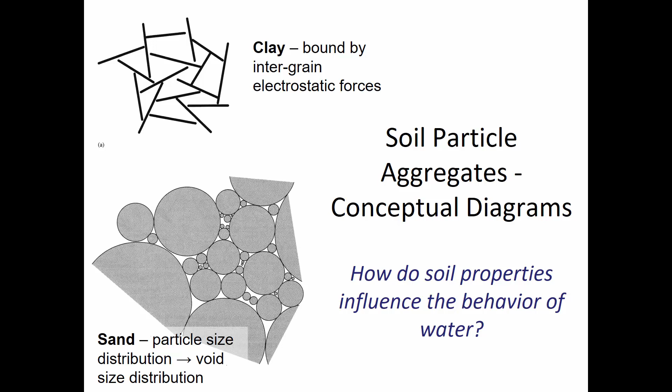So we won't actually do any calculations related to this, but the main point that you should keep in mind is that what we're balancing out with a soil is the attraction that the soil particles have for the water. And if there's a high level of attraction because there's a lot of charge, then the water can't pass through the media as quickly.

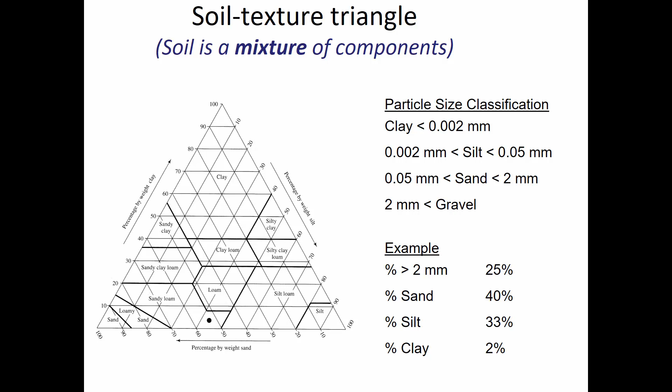And what's kind of remarkable, what was a surprise to me when I first started learning about soil characteristics many years ago, is I would have thought that clay had a lower porosity than sand, because at first the whole charged particle thing didn't really connect for me. When I had a piece of clay in my hand, I thought, well, there just aren't as many pores there. Like there's less void space compared to the solid space, but that's actually not true.

There are sands that have a porosity approaching 45% at the top end of the range. And there are clays that have a porosity at the low end of the range of approximately the same porosity. So this huge variation in behavior that we see for the infiltration capacity of clay versus sand isn't dictated by the porosity necessarily. So the amount of voids is about the same for the two. It's due to the charged nature of the particles rather than the porosity.

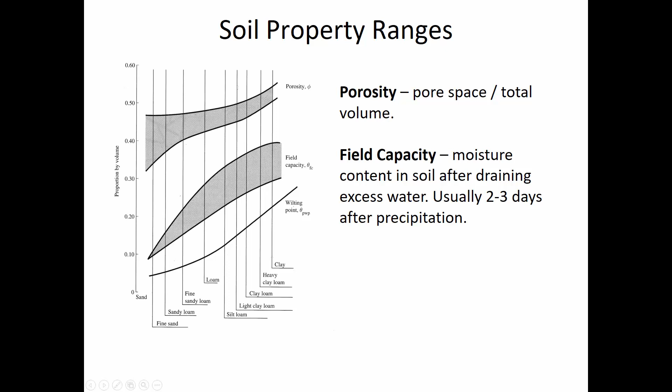And so if you have a watershed with lots of clays where you don't lose much moisture due to draining, then the antecedent moisture condition can have a much more dramatic effect than if your soil type within the watershed is predominantly sands, which drain more quickly.

Wilting point is kind of interesting because it is a description not only of the soil, but also of plants' ability to draw water out of the soil. So there's a tug of war between the plants that are planted into a soil and the soil itself, because they both want the water. The soil because of that electrostatic attraction between the charged nature of the particles and the polar nature of the molecules, and then the plants want the water so that they can survive.

So what this is showing is that you have to have more water in clay for the plants to be able to extract it, because the clay is holding on to it tightly. And so this wilting point is just another way of looking at how tightly clay holds on to water, because you need to have 20% water by volume in order for plants to be able to extract anything. If you have less than that, then the plants are going to wilt, because they can't overcome that suction attraction that the clay has for the water.

But in the case of sand, you can have water percentages down below 5% before you begin to see plants wilting. So the type of soil that you've planted different grasses and shrubs and trees into is going to affect the amount of moisture required for them to survive. So that's an interesting one, wilting point. The basic take-home message for all of these is that water moves through sands more easily than it does through clay. And we can see that directly as well with K values.

Let's talk about the soil water pressure. Now this is actually a suction that occurs in the unsaturated zone. And you remember that in fluid mechanics we talked about a capillary effect, which is due to surface tension. And in the lab we observed that. We dipped a little glass tube down into a cup of water and we saw the water level rise inside that glass tube. There were a couple of examples that we worked through to calculate the delta H that can occur based on the surface tension constant of water.

But the main thing that we saw was that as the diameter of the tube gets smaller, the water will be sucked up higher in the tube. And the reason for that is that, you remember, this is a force balance. The surface tension force is drawing the water up, but the weight of the water above the waterline is what's causing the downward force. And so in the vertical plane, we put those two things into equilibrium, and the weight of the water is decreasing rapidly when you decrease the diameter of that tube, because the weight of the water is related to the volume, which is a function of diameter squared.

So if you make the tube smaller, then diameter squared has a pretty big effect compared to the surface tension force, which is just the wetted perimeter, so the outside circumference of the tube multiplied by the surface tension constant. So as you make the tube smaller, yes, you're decreasing the amount of surface tension force up, but you're decreasing the weight even faster. And so that's why progressively smaller diameter tubes make the water draw up higher and higher. So that effect is important in the subsurface because there is essentially going to be a suction force in the soil grains.

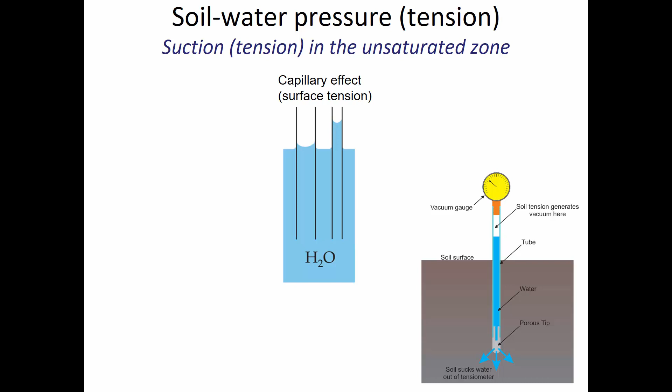So what you'd expect is that dry soil is going to be very eager to absorb the water from an experiment like this. If the soil is dry, it's going to be sucking the water out of the tube with quite a bit of tension force. And so you have higher tension when you have a low degree of saturation. But then as the soil becomes increasingly saturated, there are lower and lower suction forces.

So think about rain. You know, this is just some experiment. You can stab a tube down into the soil, but now think about what if we have raindrops that are coming to this surface. So how does the information that we've gathered from an experiment like this address what happens during a rainstorm? Well, what we can learn is that if you have dry soil, there will be faster infiltration than if you have saturated soil, because there's less suction when you have saturated soil than when the soil is dry.

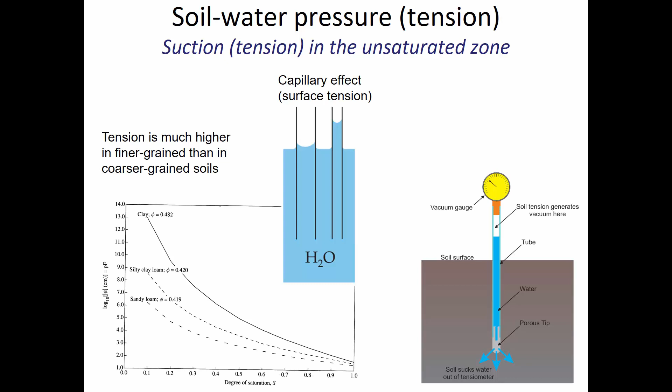All right, so I need to talk more about the idea of interconnected voids. Like when you look at soil as a hydrologist, what you should be thinking of is that's just a lot of little tubes down underneath the surface. It is a bunch of soil grains stacked on top of each other. But these soil grains are effectively the same thing as if we had a lot of these little small diameter capillary tubes, because the water is having to go through some path downward.

And what we could do is we could come up with an average diameter of that path that the water is taking down as it travels through the subsurface. And so if you have sand with relatively small diameter voids compared to a gravel, then the water has to flow through a much tighter path than if it's gravel and these big cobbles with large voids, where the water can pass through it more quickly.

So the unsaturated zone is the area that's above the water table but below the surface. Sometimes it's also called the vadose zone. That just means the zone that air is inside. Sometimes it's called the zone of aeration. When the subsurface is contaminated, different types of pollutants go different places. Some pollutants are very dense, and they'll go to the very bottom of an aquifer until it reaches some sort of a rock or a clay layer. Other types of pollutants, when they're spilled on the land, will only penetrate into this zone of aeration.

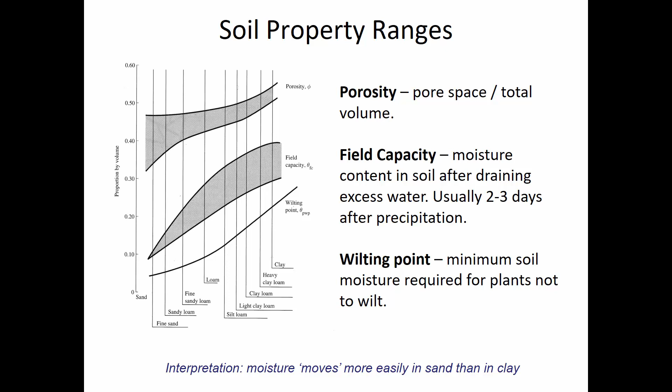And that's where capillary rise comes into play. There's even more water as you get closer to the surface of the water table. Now, below the water table, there's no more air in the voids. It's just fully saturated with water. But immediately above the water table, there's a little extra water there. The moisture content is a little bit higher because the water has been drawn up from the zone of saturation because of the small interconnected voids. The nature of those is that they act a little bit like capillary tubes.

There can also temporarily, on a short-term basis, be more than the average amount of water near the surface. Because when there's a rainfall event, water begins to penetrate down through the matrix of soil, and so the infiltration is the movement of water downward until it eventually reaches the water table. Now, once it reaches the water table, it may start flowing sideways, because you can have differences in elevation of the water table; there could be a lake or a stream over here that the water table is flowing towards.

There could be differential infiltration where you have a lot of clay in one spot, but a lot of gravel at the surface in another, and so there's more infiltration at the gravel spot, and so the water is temporarily perched on one side of the aquifer and flows laterally towards the other. But for now, one of the important things to think about is capillary rise. Now, a little bit more about those voids, the space between soil grains.

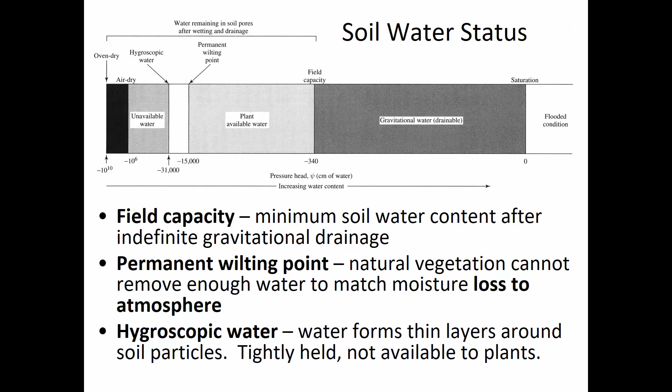So it's kind of like a water bottle, when you dump it all out, there's still like one drop left. That's a great analogy. Yeah, it's going to be even more extreme than that because in a water bottle, the void is pretty large diameter. But in soil the void is pretty small and the particles are pretty small, so the charge is higher on a soil grain. Tightly held.

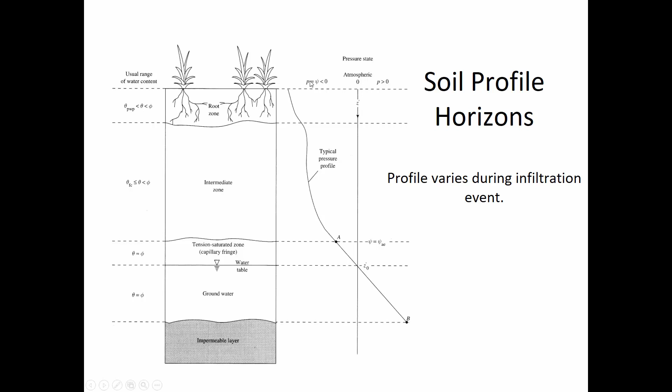Let me just first of all talk about the lateral movement of the infiltration. If we have a free surface of water, like a stream or a pond or something, then with the water that infiltrates from the surface, the water table can be perched, which means it's just a little bit higher on one side than on the other, and so that leads to sideways movement of groundwater flow.

And how quickly it infiltrates depends on what kind of soil is at the surface, and in fact the vegetative cover, how much plants there are, and the nature of the root structure may provide some little conduits for the water to go down into the soil as well.

For instance, if you have clay soil that doesn't have any plants growing at the surface, then the water is going to run off much quicker than if you had a lot of roots like grass growing in a clay soil. Then the water may be better able to penetrate through the clay if you had the grass there, kind of breaking up the uniform nature of the clay. It's kind of like the roots are another route that the water can take to get into the subsurface.

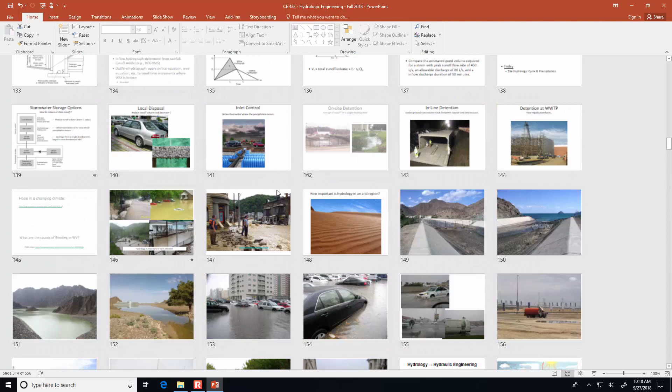Water doesn't infiltrate very quickly at this location because the desert is a very dusty environment, and the dust particles that settle at the bottom of this when it's dry will clog up the pores. Even if they started with a nice sandy soil that would be pretty good at infiltrating, the settlement of dust on the surface clogs up those pores, and then the water doesn't infiltrate as fast as it otherwise would.

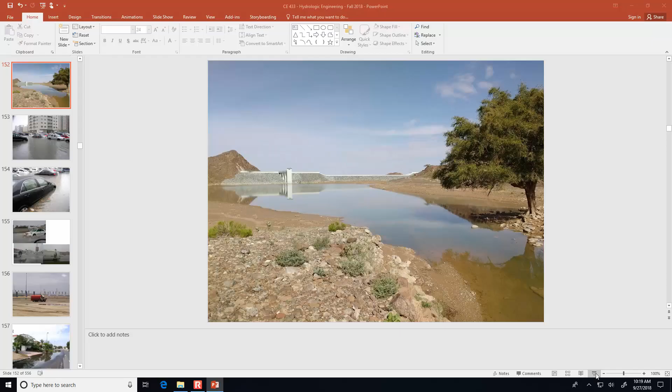So water infiltrates through the unsaturated zone and it increases the soil moisture until it reaches the saturated zone, and the groundwater flow can go laterally towards some subsurface outflow potentially. But once it gets into the subsurface, then it's kind of out of the equation for the sizing of infrastructure, because the movement through the subsurface is so much slower than movement over the surface. Think about during a rainstorm, the water is going to get to this lake or to this river a lot faster over the surface than it will through the soil.

You know, it penetrates through the soil at the speed of maybe centimeters per second at the fastest, like if it's a really coarse gravel. But at the surface, it may be able to travel at meters per second, especially if it's channelized. And so the water speed over the surface is so much faster that once the water gets into the subsurface, it doesn't contribute much to the peaks that we have to worry about for sizing things like channels and pipes.

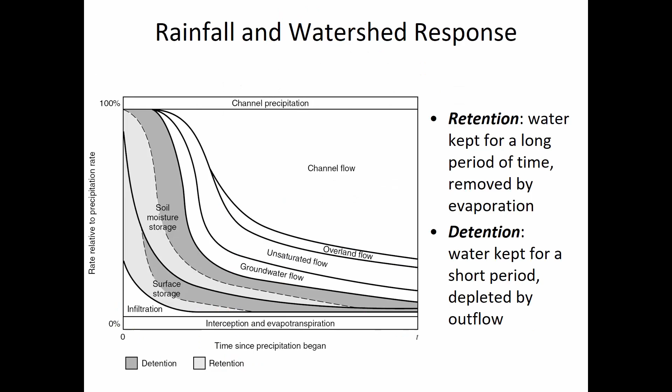All right, so a couple of important terms, and I think that these show up in the list of vocabulary that you're going to have to be ready to define for each chapter before the exam. Most of them are things that we've talked about in class, but there may be a handful of terms that you'll need to just review the text to understand completely.

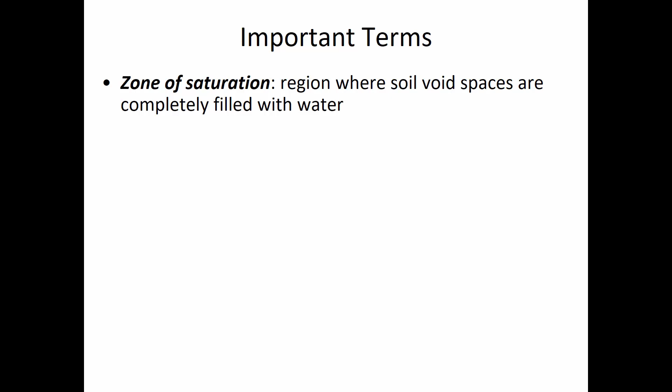The zone of saturation is where all of the void spaces are full of water. The zone of aeration can be broken up into a couple of subzones, but essentially that just means that in the zone of aeration, the voids have air as well as water. The capillary zone is the closest to the water table. The soil water zone is closest to the surface, and the intermediate zone is just in between those two.

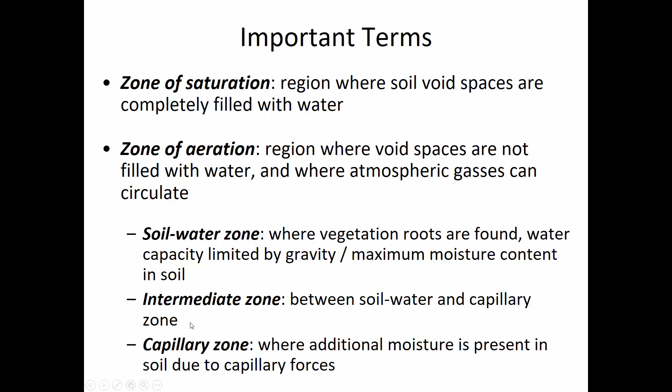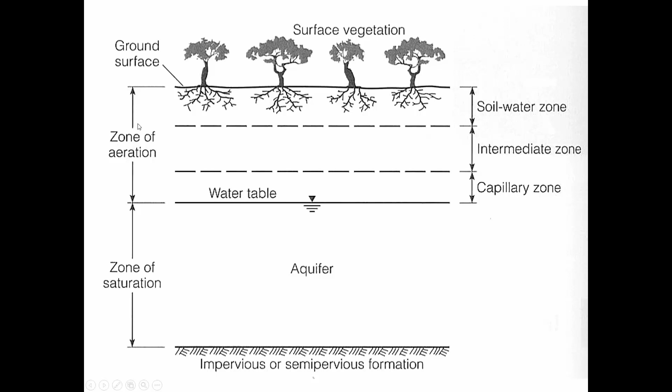So this is showing the capillary zone, which is where the surface tension and capillary effects give a higher water content than in most of the rest of the zone of aeration. And below the water table, all of the voids are full. So if we're going to be measuring moisture content with this variable theta, theta sub s means fully saturated. So at the water table, the voids are fully saturated.

What this figure shows is that even above the water table, there's an elevated amount of moisture because of the capillary effect until we get to the typical water content for the rest of the zone of aeration. So there's this gradual decrease in the water content, and there's a whole variety of void spaces in the subsurface.

Remember that if you've got a mixture of sand and gravel and clay, there's going to be some paths from the surface down to the water table that have a relatively large diameter for the interconnected route to get there. There are going to be some places where there's just a series of tubes that by coincidence or by statistical anomaly have really small diameter voids. And a series of small diameter interconnected voids is going to have a much higher rise in the moisture content above the water table.

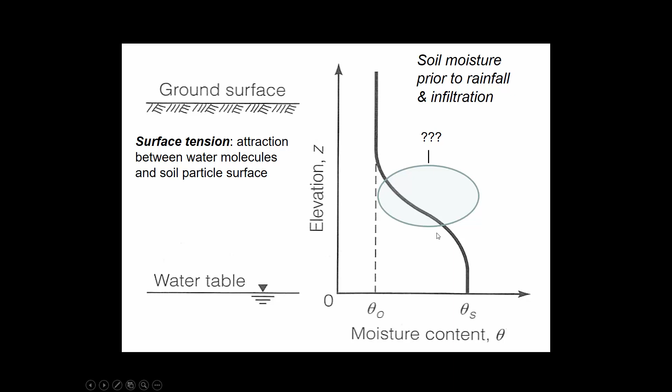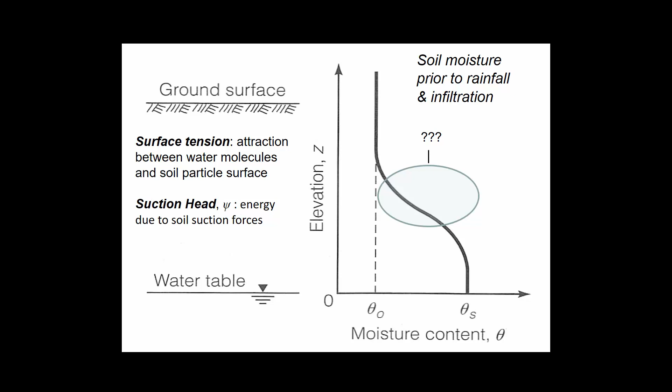So the question is how can we describe the curvature of this and what happens to it during a storm? That surface tension effect is drawing the water up, but it'll also be drawing the water downward when water accumulates at the surface. And the way that we measure that tendency for water to penetrate quickly, remember, is the suction head psi. And that can be measured in terms of centimeters of water of suction. One of the ways to measure that is with an infiltrometer.

And so that doesn't give us the best idea of what would happen during a rainfall event, because in a rainfall event, water would be spread evenly over the entire surface. So water wouldn't be going out sideways when it's raining. Water would only be going downward as it rains. So this single ring infiltrometer is not the best for estimating how the soil would actually absorb water.

And so to kind of account for that, the double ring infiltrometer says if we have this outer ring of water that's being used to satisfy the sideward movement of water, then the stuff that's in the inner ring is just going to be satisfying the downward movement. So you can measure how quickly the inner ring drops, and from that determine, in the soil, how deeply it penetrated, and this outer ring is just kind of like causing the sideways movement.

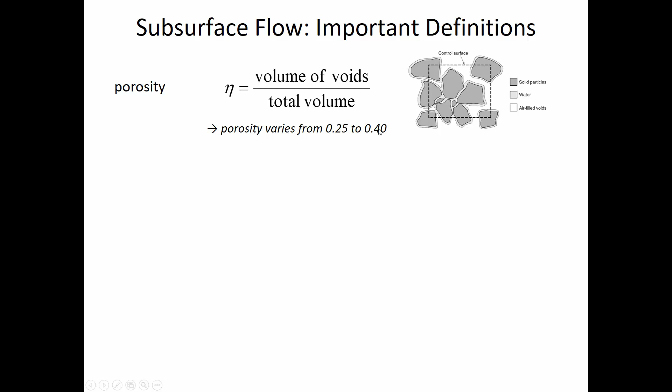If we take a unit volume in the subsurface, then the porosity is the ratio of voids within that total volume. And one of the earlier figures we looked at said that depending on the soil type, porosity kind of varies from about 25% to around 40%. Maybe in clay soils even higher than that, potentially. Soil moisture content is the ratio of water volume to total volume.

Now, soil moisture can never go higher than porosity because, if all of the voids are full, then the water can't soak into the soil grains themselves. And so the maximum soil moisture content will be porosity. So the soil moisture varies from 0 up to the porosity. And when you have saturation, then soil moisture content equals porosity.

What we'll be quantifying in a couple of the equations we look at is the change in water content during an event. So during a storm, when the water is penetrating down into the soil, it'll go from the initial water content to fully saturated. And so that change from the initial to the saturated moisture content will be delta theta. And then after the soil drains, then it has a residual moisture content of theta sub r.

I think that probably effective saturation is something that you have seen before in soil mechanics class. And that is at a certain given point, like with the conditions as they are now, so this water content theta minus the residual water content, so that's in the numerator, and that equates to how much available moisture there is at a given time. So the difference between how much moisture there is now and how much there will be after it drains.

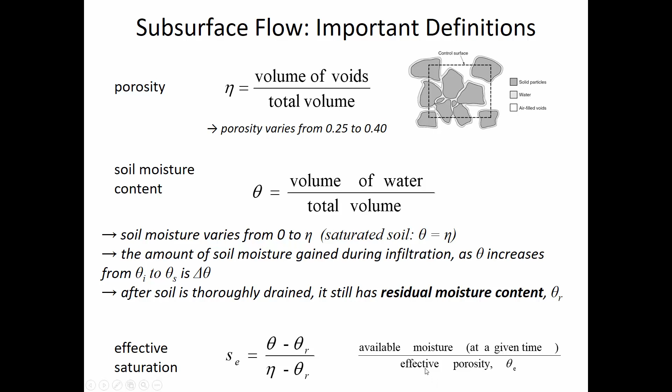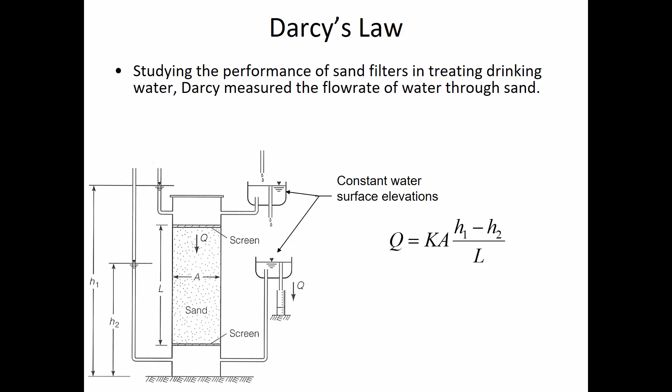But really what speaks to what's going on in the soil is captured by K. And that's going to reflect the size of the voids. It's going to reflect the charge of the particles. It's going to reflect those properties that are kind of inherent to the type of soil that it is. So hydraulic conductivity has units of length per time, and it's a really important parameter for predicting flow rate.

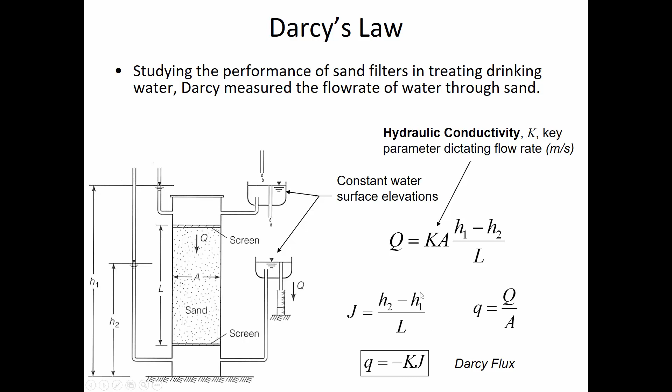Now, sometimes Darcy's law is expressed differently, like they'll call J the driving force. J would be the difference in elevations divided by the length. And sometimes Darcy's law is expressed in flow per unit area. So lowercase q would turn that into a flux if you are finding out how much flow there is for every unit of cross-sectional area that the water can pass through. So Darcy's flux has this formula. But I usually use the full hydraulic conductivity equation there.

Just to refresh our familiarity with Darcy's law, let's finish by doing this example problem. If we have a fine sand, if you look that up in a table of typical hydraulic conductivities, it might tell you it has a hydraulic conductivity of 3 meters per day. So let's find out the flow rate in terms of liters per day through a column of soil that's 1 meter long, 25 centimeter diameter, and where the head differential, delta H, is 35 millimeters.

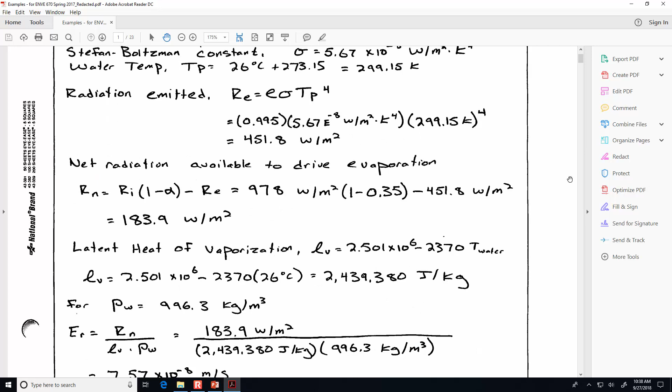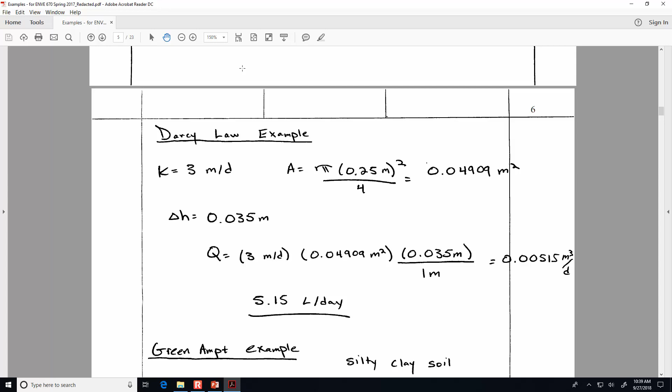The other time this semester that Darcy's law and K values are going to be really important is when we start talking about well performance. We'll spend almost our entire semester dealing with surface hydrology. But towards the end, we'll look at laws that describe, when you're trying to pump water out of an aquifer, how much the drawdown in the water table affects the rate of movement towards the well. And so those equations are pretty interesting, and we'll see K values again.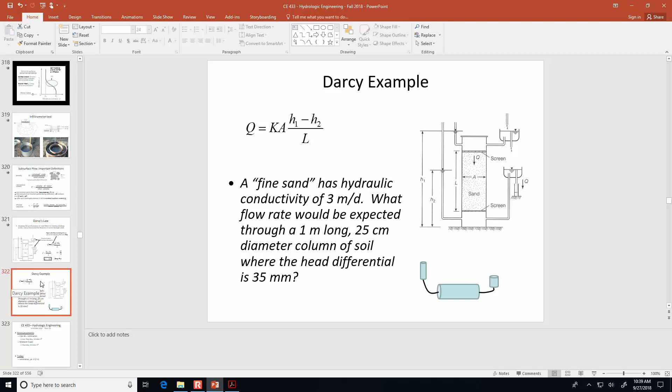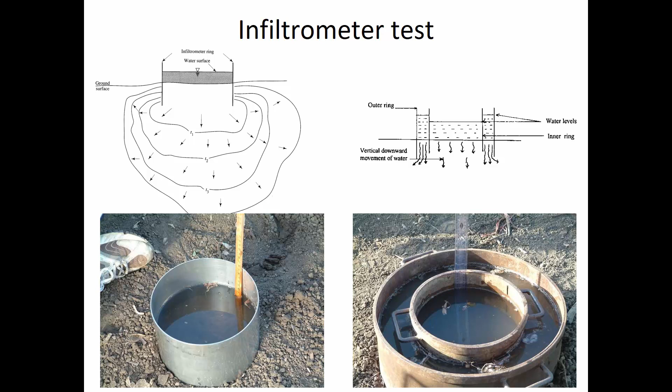So here's where we're heading next time. When we get together on Tuesday next week, we're going to look at methods for predicting how quickly water penetrates down through the soil. Experimentally, you can measure it directly, but you don't always have access to a site. You may have some basic information about the types of soil in a watershed, but maybe you can't actually go out and measure the infiltration. So there's a variety of methods that empirically try to answer how quickly water is infiltrating, and how that infiltration rate decreases over time as the soil voids become progressively more saturated with water.